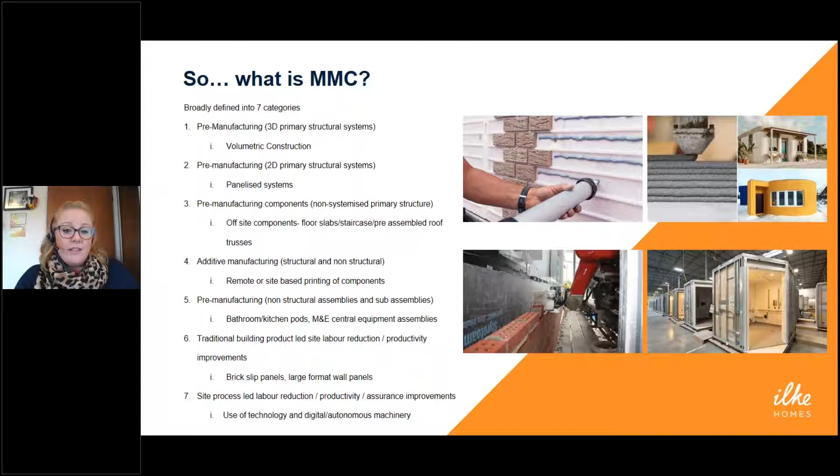I thought I'd go into a little more detail about probably the most recognised and established form of MMC in the country: 2D systems. It comprises panelised construction, usually made out of timber or steel. This is a well-proven and established method. The structure is assembled using pre-made panels, and the building can be fit out on site with services, insulation, doors, windows and cladding installed while the main structure is already there. Panelised construction reduces on-site activity compared to traditional builds, and a house can be completed within weeks of delivery to site.

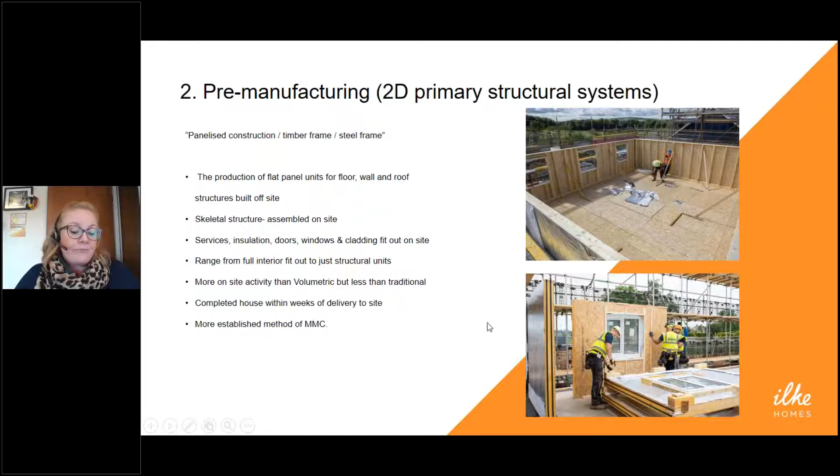I do have a short video clip showing an example of how these 2D systems are put together, so we'll just play a clip of that. Unfortunately you can't hear any sound, but this should give you a flavour of how the panels are delivered to site and how the buildings are put together. We'll just wait for that to start.

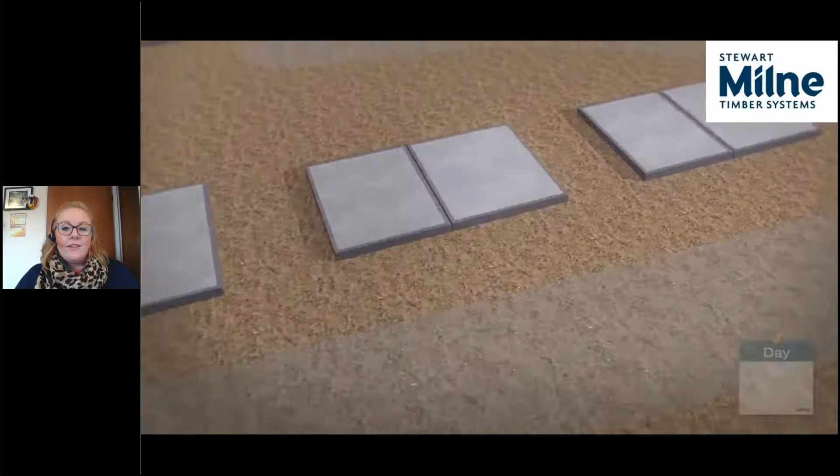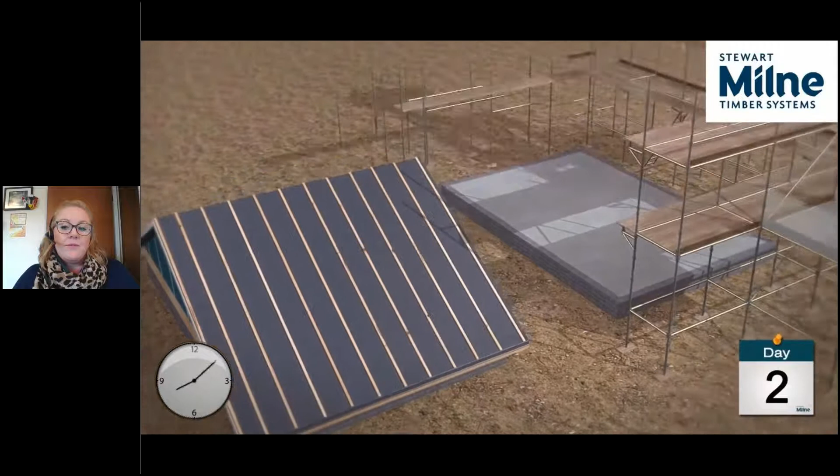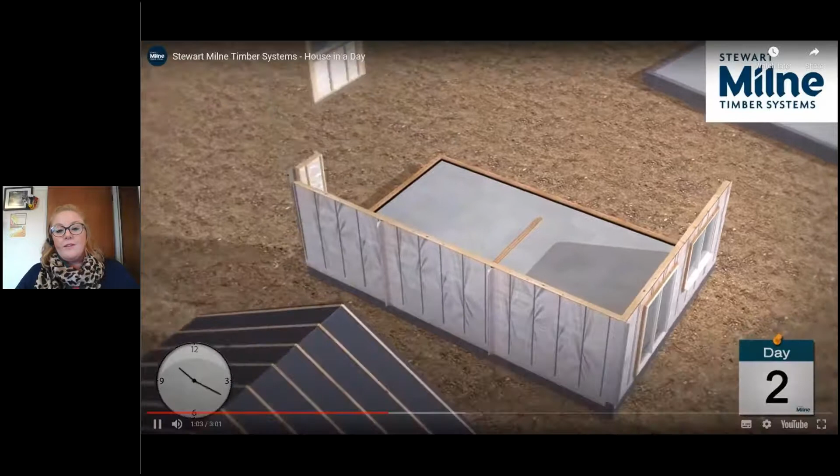With many forms of MMC, particularly our volumetric units at Ilke, you've got your initial site works done and your slab down. In this case, they're delivering the pre-made trusses and panels and popping that together. The pre-made panels are engineered so they fit right into place, and the difference between this and volumetric units is that you still have exposed elements of the build. You've still got to finish the external cladding, but the speed at which these buildings can go up is incredible.

Okay, and then it will show you how it goes on to the next one. So thank you, Charlotte.

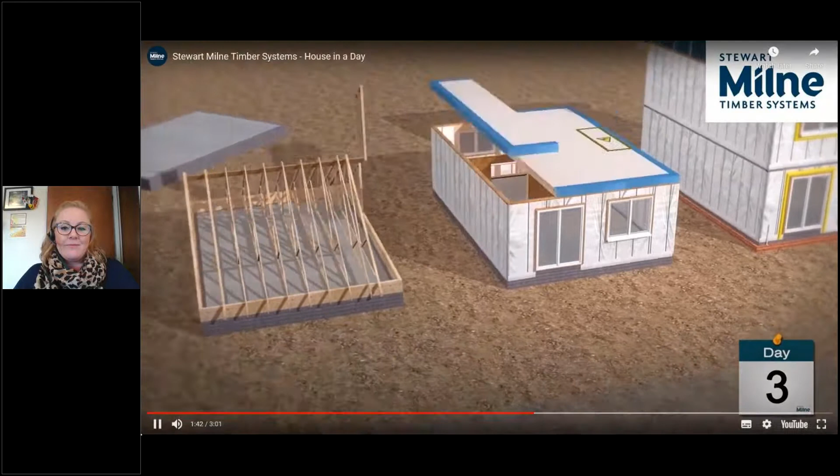So just to give you a comparison of how 2D compares to 3D structural systems: volumetric is far more advanced in that it involves the production of complete stages of the build. In Ilke's case, this means complete finished floors of a dwelling, including the plumbing, the wiring, everything finished. What comes out of the factory are complete units. Production isn't impacted by environmental conditions since we're in a controlled environment. A constant temperature means builds can go forward throughout the year, unaffected by the Great British weather. Modules are produced using precision engineering in controlled settings. This stable environment means quality and finish are far more consistent and reduces the activity required on site.

Using this method, houses can be completed in a matter of days on site rather than weeks. I have a short clip giving a little insight into Ilke Homes and our factory, located in Knaresborough.

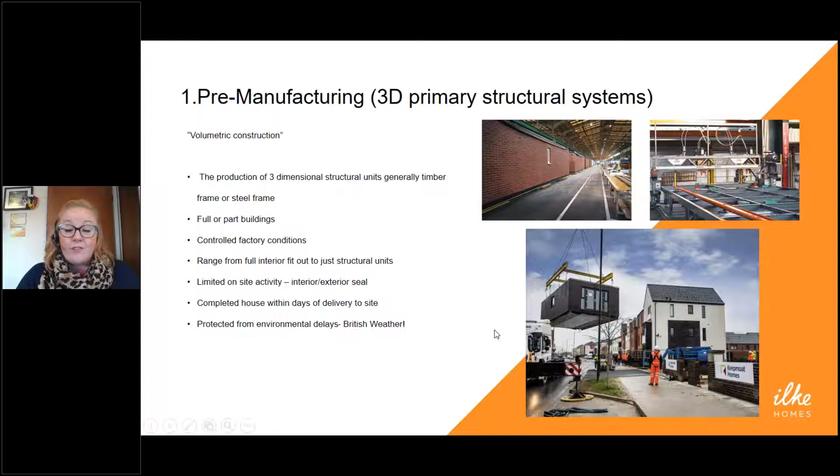What you'll see when the video starts is the extent of that factory - it's absolutely huge. Again, I apologise that you can't hear the music that accompanies the video.

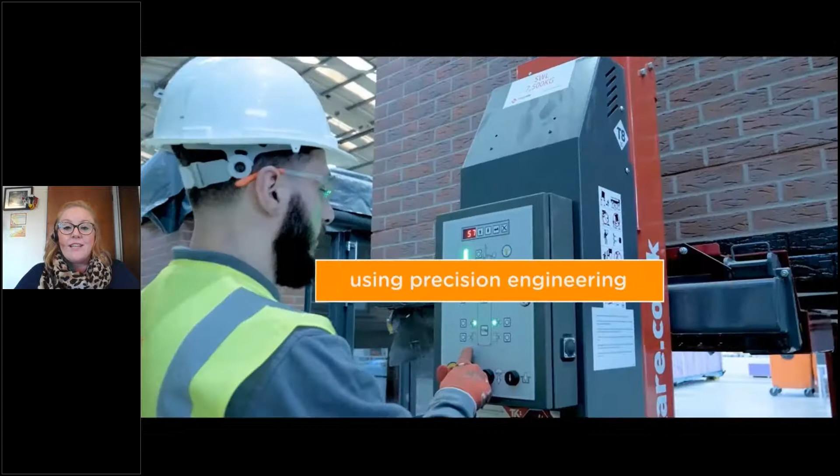As our units are being built, they pass through different stages of the factory, from the initial build of the steel frame, through to it being plastered, finished, painted and decorated, with external finishes applied, and the plumbing and wiring all done within the factory.

So here's an image of one of our units coming out of the factory. They're placed on the lorries, essentially shrink wrapped to protect them, and taken to their final destination, whereby they are craned into position.

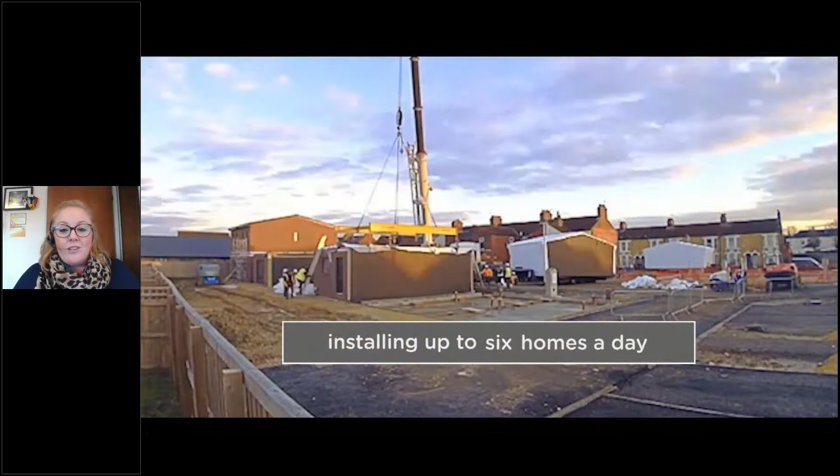Each unit is stacked on top of the other. Then we have a few days finishing off the joins between units, stitching them together, plugging them in with the plumbing and electricity on site. But they are fully occupiable, and as soon as the first floor has been craned onto the ground floor, you can go inside and walk upstairs. It's quite incredible to watch these huge buildings being put into place.

So just a little bit about the drivers and barriers to change. MMC is being recognised as a significant development within the building industry, one of the key drivers being the push for the production of more sustainable and efficient homes, which is essential to respond to national commitments to achieve carbon reduction and to provide houses quicker to meet the rising demand.

Some obvious barriers to rolling out MMC, particularly the 3D systems, include significant upfront investment - for example, the investment required to build factories such as Ilke's - and the cost of producing the units being inherently more expensive than traditional. This can be attributed to the cost of materials, the steel frame versus timber framing, brick slips versus traditional masonry, the associated costs of warehousing, transport costs, and upfront research and development costs. There are, of course, always some hurdles relating to the perception of modular homes.

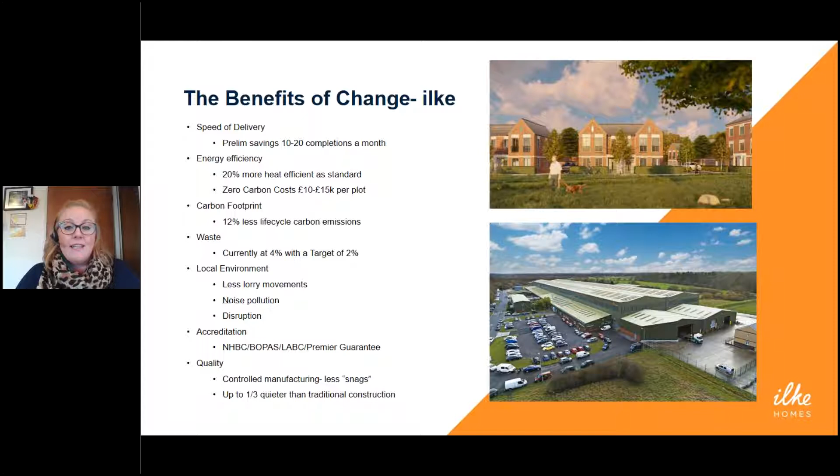So I just want to go on to some examples of projects that Ilke have been working on to date. This is one of our case studies. In September, we obtained Reserved Matters approval for 57 units in the Forest of Dean. The development comprises 1 to 4 bedroom properties and has been delivered in partnership with a registered provider to deliver the site as 100% affordable.

The delivery of this site will take around 12 months to complete. Following the initial site works, which take around 3 months, the 57 units will be delivered within a 6-month period, and a further 3 months will allow for site finishing works. If the site were to be delivered traditionally, with my old PLC hat on, the house building period alone would span around 13 months, meaning an average build period of 19 months. So there, we can deliver the project and finish it 6 months quicker than traditional.

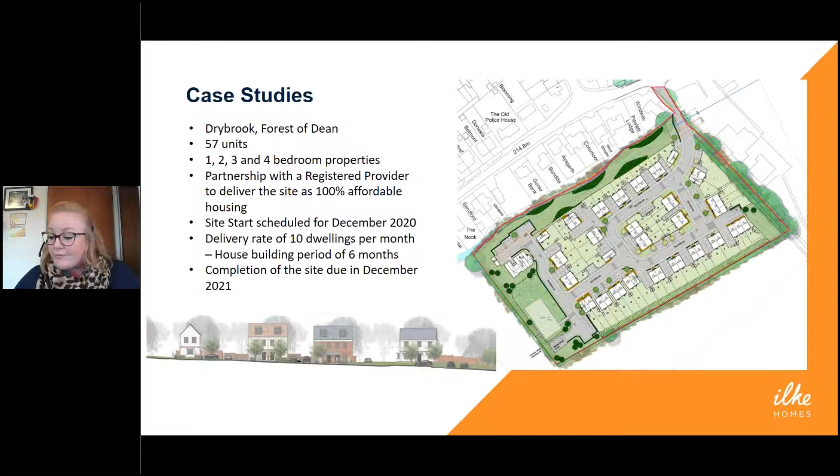My second case study is a site we're dealing with in Holmer in Hereford. It's 120 units, and we are working in partnership with Stonewater, again to deliver the site as 100% affordable. We're looking to complete this site in around 22 months, averaging at 8 completions a month, and that reduced number of completions is in line with the RP's programme rather than our capacity to build.

If you were to build this traditionally, it would likely span a period of around 40 months, so just short of 3.5 years. We will complete it in 15 months. And I think that's the real beauty of volumetric construction - work can commence in the factory to build the units prior to and whilst the preliminary site works are taking place. The units can then be delivered to the site and finished within days, and developments can come forward at an accelerated pace, with homes available for occupation in quick succession.

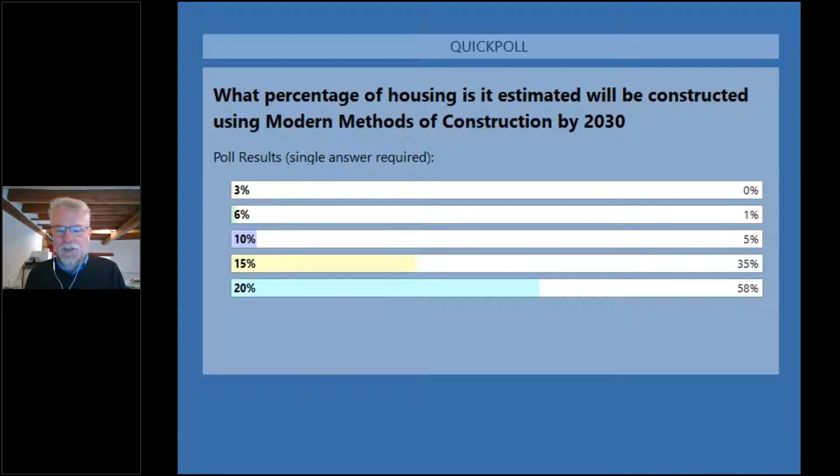I'll just do a drum roll for the results, but here they come. So a large percentage of you have gone for either 15% or 20%, and it is in fact 20%. Both Savills and McKinsey and others think that by the end of this decade, we will have 20% of our housing stock being delivered through MMC. So that's quite a difference, quite an increase.

In relation to where we are now, I'll just do a couple of things. I'll talk a bit about MOBIE and what MOBIE's about very briefly, then housing design in more general terms, then the planning issues around MMC, a little bit about skills, and then a couple of slides at the end. Always good to have reasons to be cheerful, so I'll do those, especially in 2020.

So MOBIE - Jadine gave a little introduction. Really we're a housing and education charity focused on improving homes, set up by George Clarke, the architect and TV presenter. What we wanted to see is a great improvement in the design and the build of homes. And by build, we mean manufacture as much as we mean traditional build. We want to see that done through educating young people in a new way of building homes. We can be so much better, and I'll come back to that in a minute, but that's really MOBIE's rationale.

And we do that through an education program, working with partner education institutions from BTEC right up to PhD, through school engagement and competitions, and through innovation.

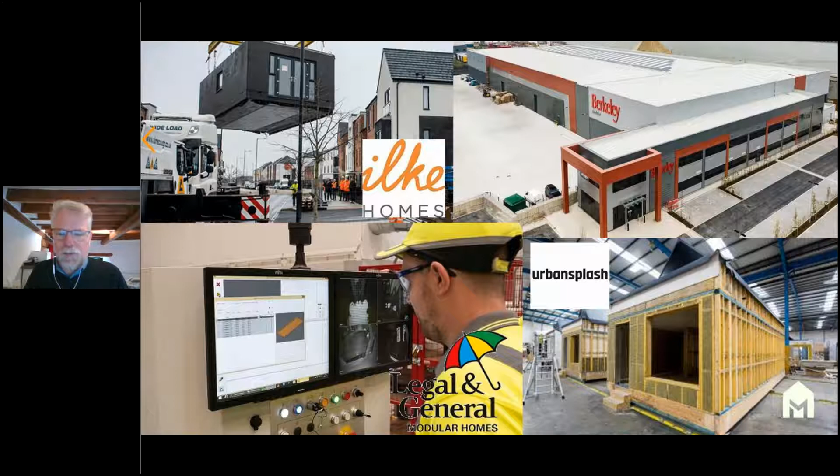If you say to the public, actually, we're going to put some houses here for local need, and most of the operation will be done within a week or so, that becomes an entirely different proposition. I think there's a potential on small sites for acceptance to be greater. You can also, with cranes, bring stuff into difficult sites, which you might not be able to do very easily with traditional construction. So there's a real opportunity here to open up some potential sites and to reduce public concern around the disturbance and noise of building.

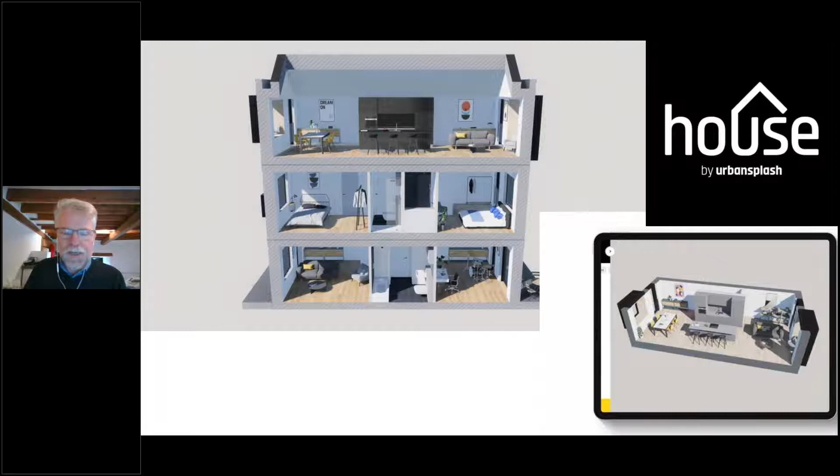Another thing that's quite novel in relation to our volume house builders right now is the degree that people can specify and bespoke their homes. This is Urban Splash's housing configurator, where people can go in and, within their traditional house model—one of their modular house designs—configure the internal fit to quite a high degree. Now that's of less interest to you as a planner, building regs might be interested, but there is the ability to configure the external as well.

For example, in Basildon, Swan Housing Association have been working with the local authority, and there is a site where they've consented a large number of houses, but for external appearance there are up to 7 different external claddings that house owners can choose. So you would be granting permission for the type of dwelling, but not necessarily the final detail. That's one for members and us as planners to get our heads around—the form, content, scaling, massing, all of that we might be having a decision over, but we might leave it to the individual house owner to choose the external appearance. That's great for home ownership, but a bit of a challenge for planners' control, and for members too.

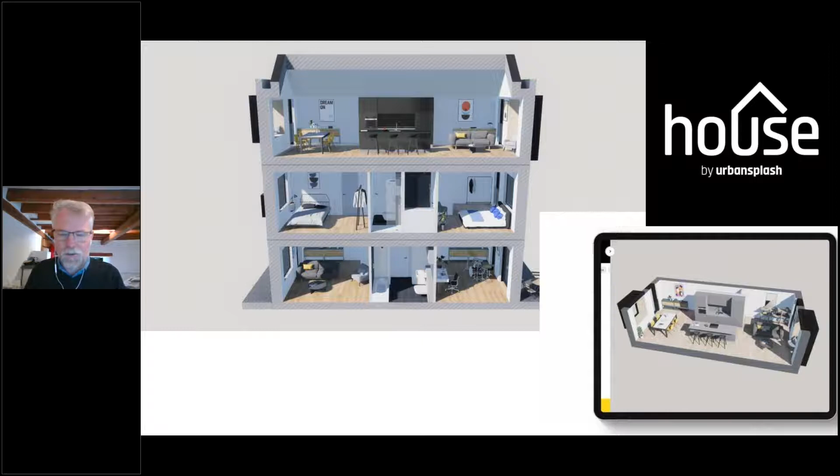Then I mentioned local labour agreements. They don't apply in most cases, but traditionally it's been: let's train some people up in construction as part of a large housing scheme, as part of a local labour agreement, and potentially a Section 106 obligation. Now that becomes more of an issue if, like Ilke, you're manufacturing those homes up in Yorkshire. Clearly the opportunity to train the local workforce in building those homes won't happen, because those homes won't be built locally.

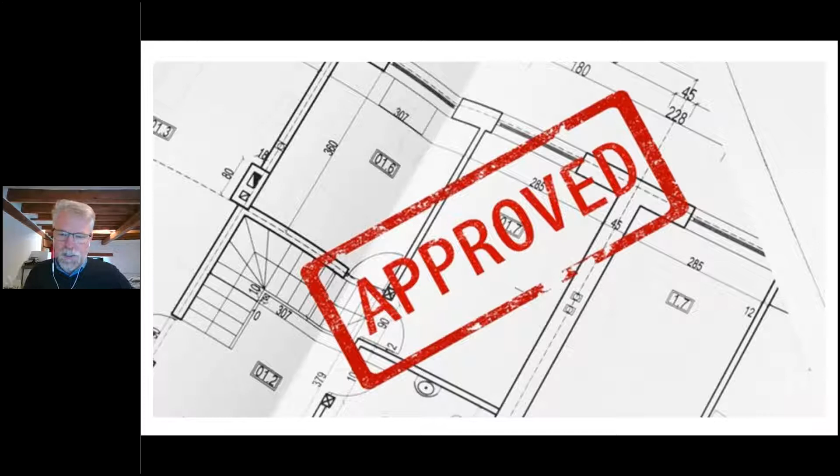If we think about this as designed for manufacture and assembly, DFMA as it's known, the opportunities lie in design and assembly. So there's a need, if you've got local labour agreements, to think about how you're going to train your local workforce into the assembly parts, the working-on-site aspects, and the design aspects, given they won't actually be doing the construction—that will happen in the manufacturing plant. It won't apply everywhere, but it's one we're just beginning to get our heads around in terms of local labour agreements. There's a big skills agenda here, so there's a real opportunity to think more creatively.

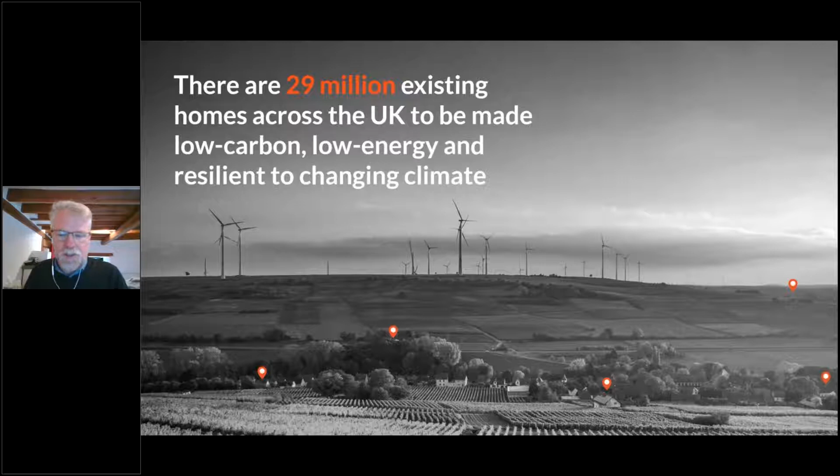I said retrofit—there is an opportunity for MMC to play a part in retrofit, but it's a bigger agenda itself and I didn't want to miss it. Related to that skills agenda, we've got up to 29 million existing homes to be retrofitted so we can hit our zero carbon target, with the built environment contributing 40% of our emissions. It's a real opportunity and a real need, and there are chances there to both use MMC and to reskill in relation to the built environment.

I said I'd touch on skills. So as well as the housing crisis, if that weren't enough, we've got a skills crisis too. In the construction industry—this is Mark Farmer's report, done probably 5 or 6 years ago, which didn't hold any punches, calling it 'modernise or die.' There's a lot of problems, but one is that up to 25% of the workforce are over 50, meaning 25% will be leaving in the next 10 years, when we need to build 300,000 houses per annum—nearly 100,000 more than we've been doing—and only 10% of the workforce are below 25.

So there's a real issue about how we bring new people in, but there's a massive opportunity with MMC to bring in new people, to attract them to digital or manufacturing skills, and to retrain people from other sectors, including those affected by COVID. There's a real opportunity here in the skills agenda to make a difference, and MMC can play its part.

So my two reasons to be cheerful slides—this one is around skills. I said we held design challenges; this is the first one that MOBIE held back in 2017.

What I think is noticeable about the winners of this competition was it was an all-girls school from a very deprived part of Nottingham, highly multi-ethnic, and they see no barrier to getting involved in housing design. Indeed, all of them now want to get into the industry in some way or other. So the pent-up demand and the latent skills are there to be tapped into. It's just that as an industry in terms of construction, housing and the built environment, we are really, really poor at converting those people into people coming into industry.

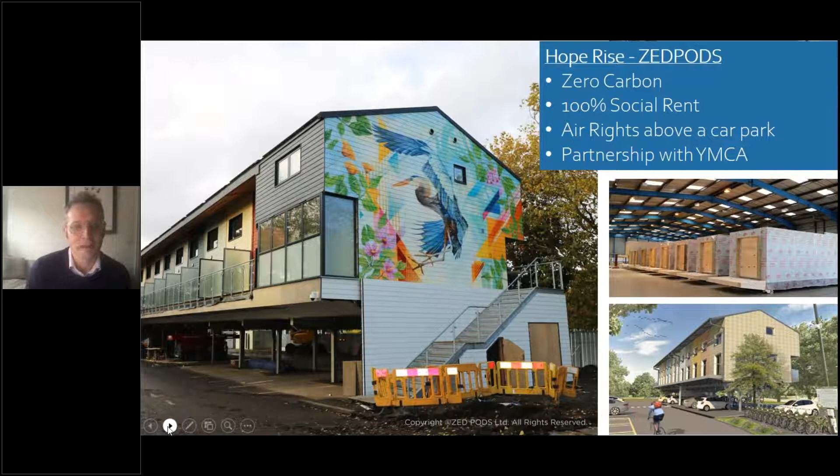The next scheme that we moved into was BoKlok, and it's now got planning consent and they're on site, just on site now. This is the Swedish model - I'm not going to touch the buttons, I'll let you do that, Charlotte.

BoKlok is a collaboration between Skanska and IKEA. We were really keen to engage with them because their whole model started in Sweden around asking how do we build houses that people can afford. They looked at the mortgages people could afford and their living costs, and tried to build to that agenda - very different thinking from the traditional market and capitalist macroeconomics of this. So that has got planning consent.

It's 173 homes. It's a very difficult site, one that's been in Bristol for a long time, and there was a real commitment to landing this - huge credit to Bristol City Council. A lot of work went into the interplay between the adaptability of volumetric construction, learning where the movement can be, but also where some of that rigidness works, so you're looking at the gains as well as the compromises in terms of overall cost and efficiency of the building.

Within this scheme there was a lot of collaboration around the energy solution - not just policy compliant, but moving forward, because BCC was so invested in this, asking how can we take gas out of this, how can we really drive the sustainability of this story forward, which very much fitted with the BoKlok brand.

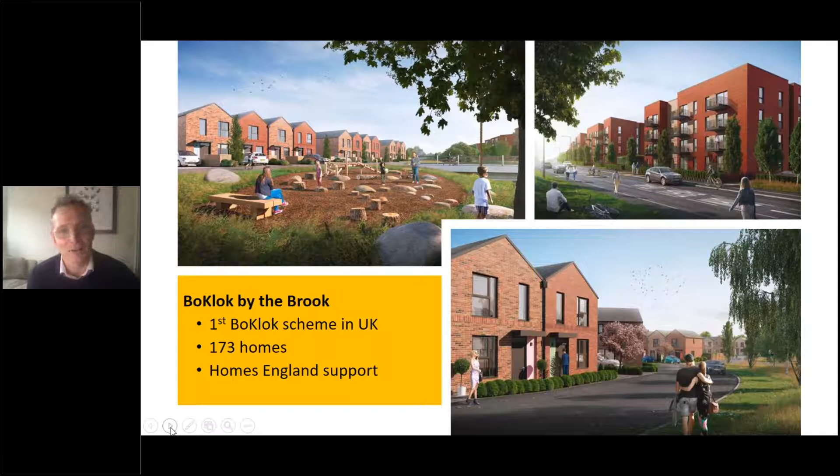Another scheme that got planning consent just last week is Legal and General Modular Homes. We're delighted by this because this was a piece of land - you can skip forward, Charlotte, please - that has been in our local plan in Bristol for 20 years. It's had a few failed planning applications and it's a tricky piece of land.

It's right by the train line there, and it's got power cables, but there was a wonderful collaboration between Bristol City Council, who brought this piece of land forward for planning, working hand in glove with Legal and General Modular. What we saw was the ability to work against a set of shared objectives, to work up front on the design and viability, and to really look at how this could be a great place, along with consultation with the community to build that story of trust.

This actually delivers a 4.5% net ecological gain as well, and that's become a really important part of how that collaboration using modular, working against shared vision and shared values, plays out. Although that isn't yet part of planning, ecological net gain will become part of the planning context we're all going to be working in. So that's L&G Modular delivering 51% affordable.

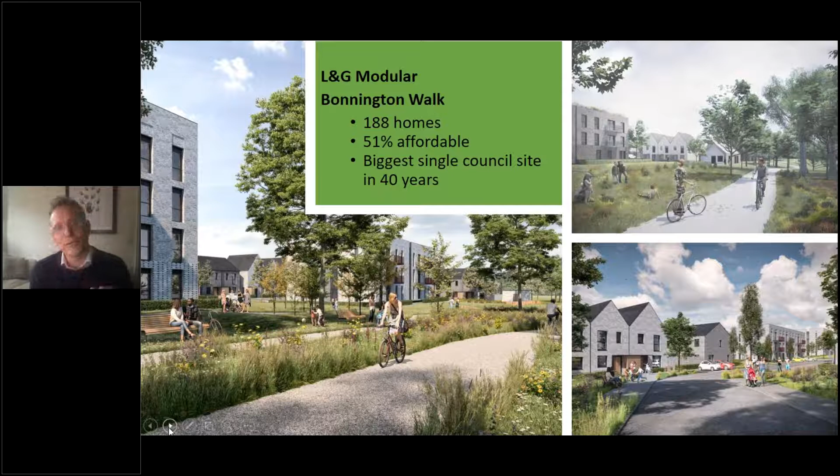Now those three schemes have become part of our Innovate UK project. We partnered with 9 different modular partners to look at how, working with the council, we can really promote and develop engagement with modern methods of construction and test and learn how to apply it. If you go to the next slide, Charlotte, I can show you very quickly what that project is looking at.

This is looking really about the decision making, the strategic alignment, the policy alignment. How can we create an environment within a local authority that is sympathetic and empathetic to MMC? How can it be institutionally comfortable? Because I think for many people, when they engage with MMC, they think it's a tweak. It's not a tweak. It actually creates a lot of fundamental shifts in some of that sequencing and thinking.

Now, that could be a problem. It can also be a massive opportunity, because where you get the invitation to really rethink things, you can start again thinking strategically, how do we deliver that sustainability? How do we really focus on the lifetime cost of these homes, not just the upfront costs? How do we engage with the social value act? So we're looking at the wisdom of outcome-led procurement about what we're trying to deliver, and not just the upfront capital costs. So whilst it creates a problem for busy people working in local authorities and planning departments, the way we're presenting this is a significant opportunity to think through strategically how, as the MMC sector evolves, it can evolve around an opportunity to build the homes and the places that our cities desperately need.

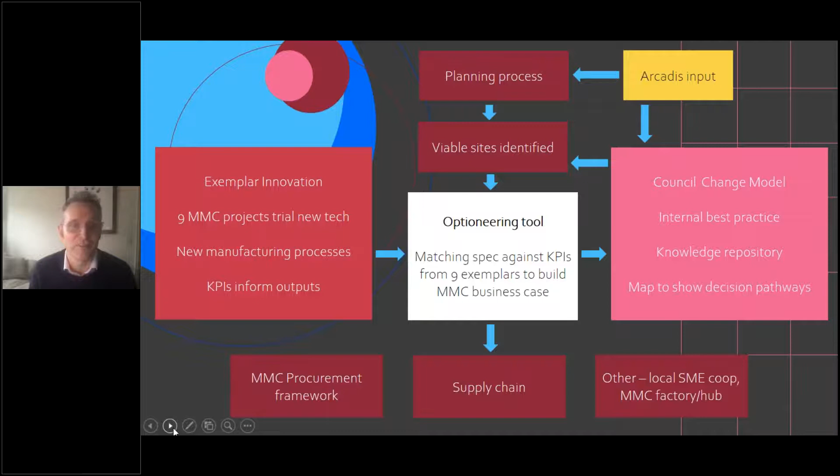Now, that is a change in mindset. That's a change in sequencing of decision making. It's a change in governance. It creates a change in the kind of warranty debate and the need to really line up so many different elements of this, including your procurement strategy.

So what we're playing with within this Innovate UK bit is, what are the lessons that we can create? How can we create solutions that we can then share with other councils? And out of that, we're hoping to produce what we're calling an optioneering tool. And that's going to be called Constructing Modern Methods.

The idea there is, what we're seeing, particularly for local authorities, is it's very difficult, and true for RPs, as the MMC market is emerging at pace. How do you interrogate that marketplace? How do you get confidence that your policy and your procurement strategy is going to be right? We're trying to design something that allows, around a set of KPIs that are being co-designed with Bristol City Council, for local authorities to interrogate that market, build their business case around what they need on that particular site that aligns with their policy objectives, understanding the site constraints, and then very quickly transition to a procurement strategy.

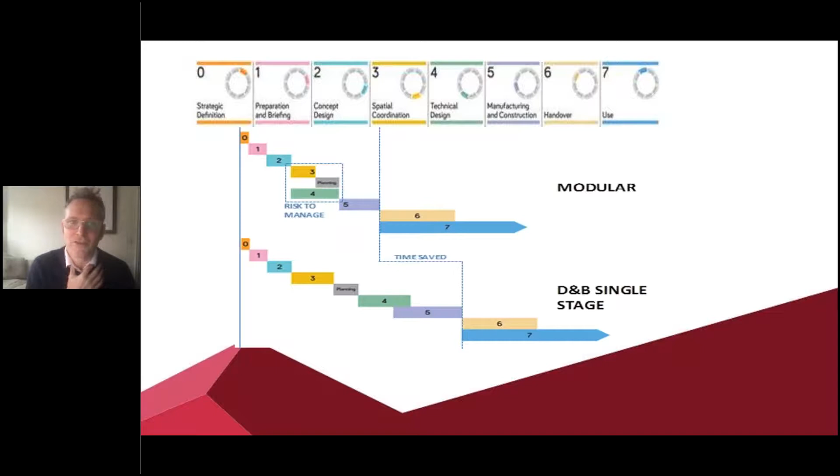And I think just finally, because I'm conscious of time, this all works out in this broader context. Next slide, please, Charlotte, that'd be great. There is this systemic need, as again Mark was particularly into this, some of the housing crisis is fixed by our ability to create more supply. Some of our housing crisis is going to be fixed by our ability in the UK to have a different supply of housing that can work counter-cyclically.

So for these factories, one of the operating systems that they have in terms of their ability to deliver is the fact that they need to be building, they need to be churning through these homes as they are delivered. And so how we create the opportunity that those factories can have a sense of demand being put through them could be counter-cyclical. If we had a downturn in the economy, they still need to be building those homes to make their business case work.

I think that's a huge opportunity. We see national government driving an agenda where MMC will become hopefully more acceptable, more understood, more institutionally engaged with. Through the Affordable Homes Grant, we see a real commitment for MMC. We see Robert Jenrick consistently talking about the need to diversify and create more competition in our housing supply market in the UK. We see construction costs increasing, which may mean we start to see greater parity between modern methods and traditional build.

If you've not read Mark Farmer and Mike de'Ath's report, Build Homes, Build Jobs, Build Innovation, I'd really encourage you to, because I think that's critical thinking around this need to look at, particularly for asset owners - local authorities, RPs, build to rent - how MMC gives you that quality assurance, that route through where you're going to hold an asset longer term, and the lifetime cost of that building becomes a real opportunity to drive this change.